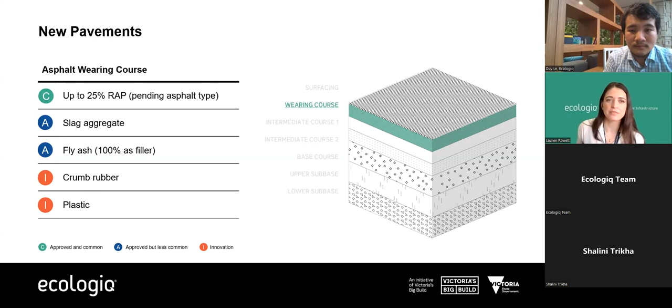Next up, we've got supplementary cementitious materials in structural concrete. As you can see, this page uses photographs as opposed to the technical drawing we saw in the last one, and your guidance on allowable limits here is quite broad. This is where you'd use those reference guides for further information as to what is allowable for each SCM and in each application.

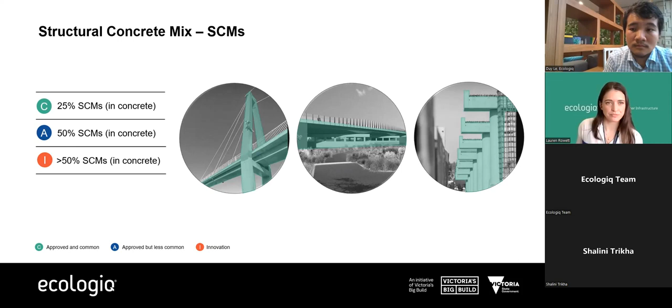Thanks, Lauren. Talk a little bit about a great case study featured early on in our Lunch and Learn series, I think late last year or earlier this year. The Western Program Alliance and the Level Crossing project actually pushed the boundaries in terms of innovating and went beyond 50% SCMs in their concrete mixes. The mixes for structural piling were delivered with Holcim, VicRoads, DOT, McConnell Dowell and Arup.

What they found there is significant obvious savings in carbon. We know that concrete is responsible for 8% of global carbon emissions globally, so any way you can replace that is going to be a real win. By pushing the boundaries with that, the project had to seek approval from DOT, or Vic Roads as it's formerly known, and they were able to come up with a 61% recycled content mix, which again met the performance requirements of a 40 MPa structural concrete.

Great case study. If you do want to find out more, you can reach out to the Level Crossings team at Western Program Alliance, and they're happy to have a chat with you about how they went about that process. Thanks, Lauren. Thanks, Duy.

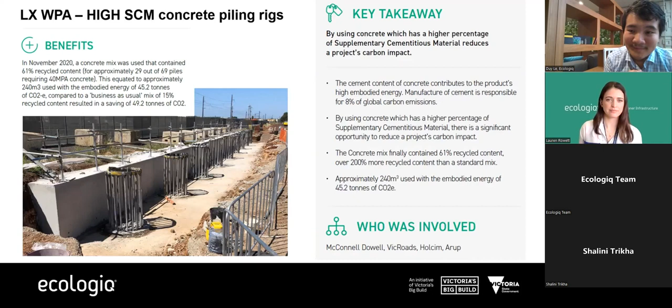So the next one up is noise walls. Noise walls sit in the concrete category, but as you can see, one of the approved but less common replacement options on the slide here is recycled plastic panels. This really just demonstrates that the sections refer to those business as usual materials, and within it there may be recycled alternatives which are completely removed from that business as usual product. So noise walls and retaining wall panels are generally a concrete product, hence being in the concrete section, but there are replacements here that are completely recycled as well.

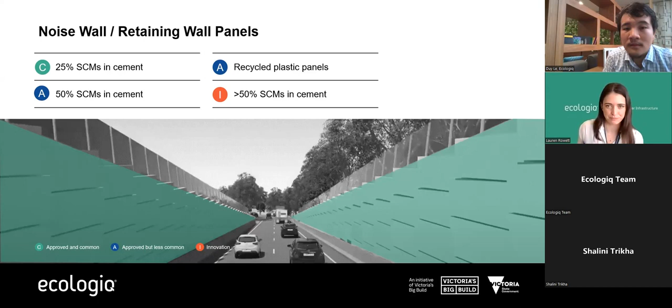Some of you may have seen recently the Mordialloc Freeway Major Roads project was touted as the world's greenest freeway and construction project, partly because of those recycled plastic noise walls that you see there, made of 75% recycled soft plastic—that really difficult to move plastic that you bring to your supermarket. Noise walls really are only limited by your imagination.

They've been used previously on the Peninsula Link Freeway, on the Monash Freeway. That's a concrete noise wall, but as those panels have deteriorated, they've been replaced with recycled plastic copies to fill those in. So when you're driving along the freeway, they're indistinguishable from other concrete products.

For the Level Crossing project, they found those particular panels are made with 50% recyclate, and the advantage of plastic is that it can be rotomolded, meaning it's hollow and lightweight. Not only can it put away a lot of plastic waste, but it has a lot of gains in terms of weight saving and safety when handling at heights. Similar panels are being explored right now for other projects like Melbourne Airport Rail with elevated rail viaducts.

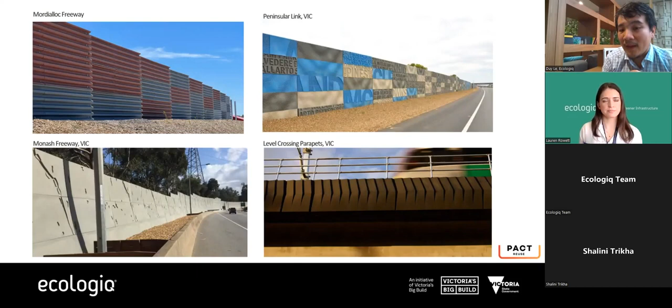This trial has research from Melbourne University finding that it meets the Australian Austroads national standards for noise walls. So this project, Integrated, is now looking for a project to trial this type of noise wall to meet Victorian Vic Roads or DOT standards. If there's any projects out there looking to set up noise transmission absorbing walls, this is one to look at—another innovation. This stuff is made here in Victoria, and it can again make a huge dent in our plastic waste problem.

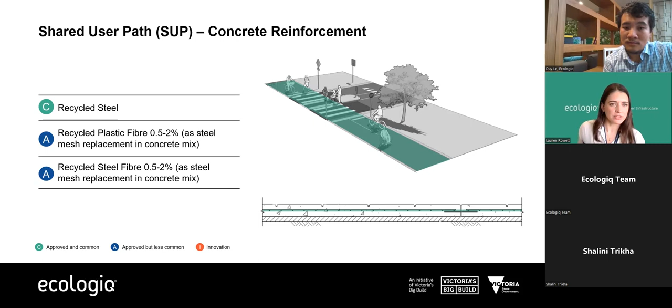The next one we're going to show you here is shared user path, and here we're actually looking at the concrete reinforcement. You've got the diagram showing where a shared user path is with cyclists and pedestrians along it, and underneath, the technical drawing showing that reinforcement goes right through the middle. This sits in non-structural concrete, and there are a few different plastic options as well, not always steel.

Thanks, Lauren. At the moment there's a product on the market called eMesh. I'm sure many of you may have heard about this already, but I want to take the opportunity to answer some questions and dispel some myths about its use. Firstly, there's significant carbon reductions in using eMesh, mainly because it replaces steel, which is one of the most carbon intensive metals that we mine for, and given the weight of the product, your carbon offsets are already there.

It has been used extensively across Victoria by some of the local councils on level crossing and major road projects, mainly in shared user paths. But it's actually been used for almost 20 years in Queensland, where despite some concerns, they found similar or superior performance to steel reinforced concrete, with superior properties in resisting—obviously plastic doesn't rust—but also resisting acidity and things like that in soils. Another benefit of using eMesh is it's manufactured in Victoria as part of the production of the product.

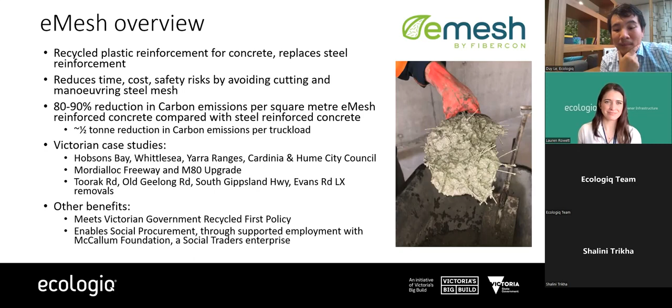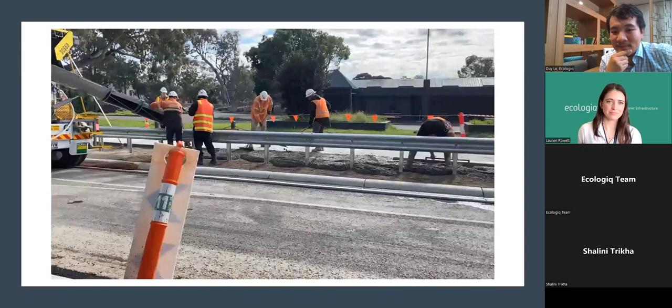A social trader and social enterprise called McCallum Foundation package and do the transport logistics for eMesh. It's mixed in at plant, so it doesn't always look exactly like that bundle of webbed concrete that you see there. Just to give you an example, we've got a video of eMesh being poured by the major road projects recently, showing workability. Thanks, Lauren.

And that's the final product there, shared user path. So there are some considerations in terms of workability when using eMesh—in terms of finishing and pouring. But the important thing is that the subbies who've been using eMesh and pouring the stuff have found that once they understood the workability, it's been faster to lay because it's quicker to work with than laying down steel reinforcement.

And there's obviously reduced safety concerns there as well. You can see from the finish there, if it's done correctly, there won't be any eMesh protruding from the shared user path or any plastic fibers sticking out. Those fibers themselves are actually UV stabilized, so even though they have a 40-year design life, they're expected to last a long time without degrading. Thanks, Lauren.

The next one we've got here is conduits. As you can see, conduit reuse is approved but less common. Obviously, with all reused products, they must be serviceable and approved for their intended use. And then we've got recycled plastic as an innovation, something that is ready to trial, and in fact is in trial currently.

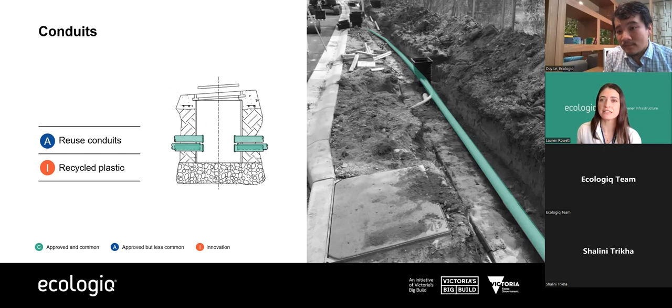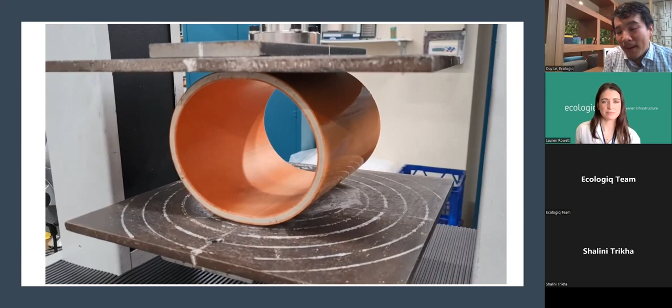This is what's called a sandwich layer conduit construction pipe, where that white inner layer is made of recycled PVC with virgin plastic only used on the outside. This is currently approved by V/Line for use, and the Shepparton Corridor project has laid over 130 kilometres of this conduit pipe. At the moment it's undergoing review by DOT, hopefully for approved use across Victoria.

It's important to understand why these conduit pipes are only 50% recycled in the center, and that's because this is what 100% recycled pipe looks like. At the moment you can purchase from RPM Pipes and Green Pipes a 100% recycled drainage pipe.

The only issue is you can't control the color of recyclates - you can see it comes in different colors, and this is one from another manufacturer, Green Pipe. So the industry has found a workaround in having solid core recycled construction pipes, and hopefully they'll be approved for use shortly across Victoria.

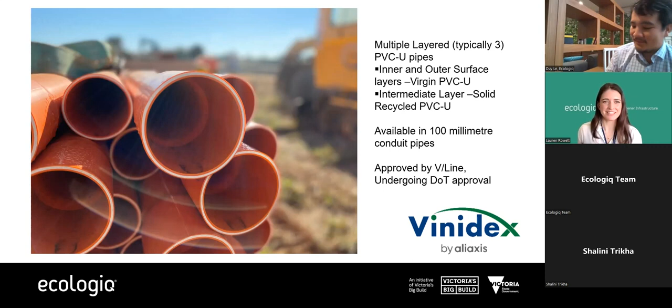This one's conduit bedding. As you can see, it's the same photograph we saw in the slide before with the conduits, but with a different part highlighted in green. As you go through the guides you'll see some photos used multiple times, just highlighting a different section. Again, you've got the diagram here showing where the conduit bedding actually is, which in this case is a replacement of 100% recycled glass sand.

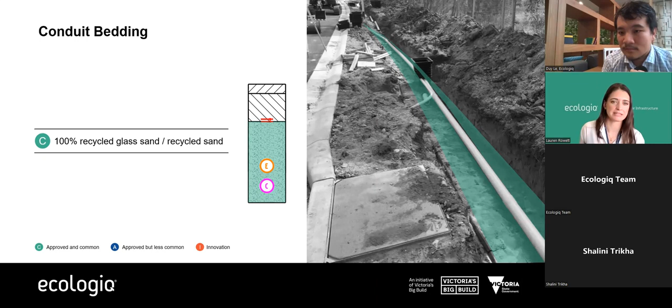Speaking of recycled glass sand, that can also be used in coloured surface treatments and line markings. Coloured surface treatments are very common, and line markings are a bit of an up and coming product as well.

One of the ones that you can use right away today, no trial needed, is OmniGrip's high visibility surface treatment. This has actually been used already by the level crossing removals project at Reservoir Station - that's a photo there of the surface markings at night.

I thought we could do better and actually show you what it looks like in real life, so that's a sample there. You can make it in different colors depending on what sort of pedestrian crossings, bus lanes, or surface treatments you need.

My understanding is this hasn't been picked up more because line markings and paint surfacing is often left to our subcontractors on projects. So if you're looking to use this, make sure you specify recycled glass sand or recycled products as an option for line markings. Otherwise you might end up with whatever cheapest paint and line markings are available on the market at that time. Great product - again, OmniGrip, Smarter Road Safety makes them.

I do want to talk about recycled glass sand for a moment, because every time we run these sessions we get the same questions coming up around risk, handling, OH&S, and silicosis. So I actually have a sample here of recycled glass sand.

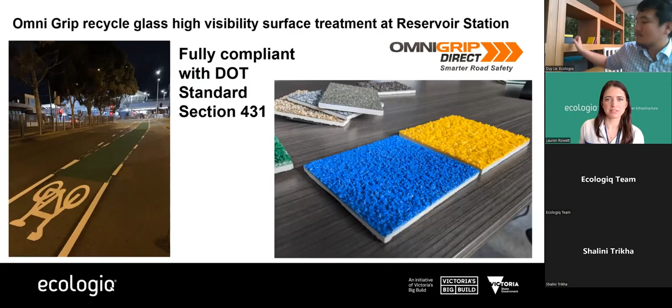So the next slide we've got here is sleepers. Sleepers are another one where we've got multiple recycled and reused materials covered - supplementary cementitious materials in concrete, approved and common. We've also got sleeper reuse, which would require inspection and approval by the rail transport operator to make sure they're in good enough condition for reuse, generally in lower risk areas.

And the third one here is recycled plastic composite sleepers. Although they are reasonably commonly used, they're listed as approved but less common because there are conditions or caveats to their use, which can vary across the rail transport operators, and each one would need to approve them for use on their projects.

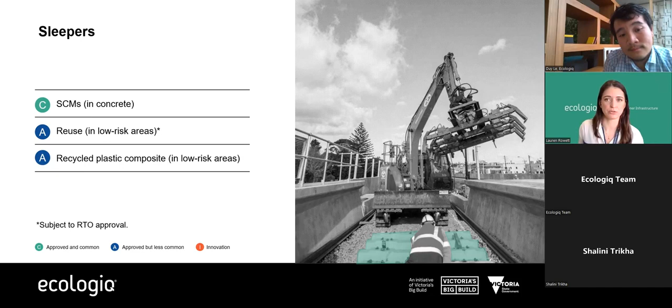This is a real story of homegrown success. Integrated Recycling manufactured the DuraTrack sleeper, made from recycled plastics, right here in Mildura, Victoria. It's already been type approved by MTM and V/Line for low speed use - for the regional rail revival program, level crossing removals program, stabling yards, low speed sidings, turnouts, and any low speed application. It's a great sleeper in terms of timber replacement.

At the moment, it's still undergoing trials with ARTC. In terms of putting away tons and tons of plastic, these have at least a 50-year design life, but they're expected to last a lot longer than that, easily outlasting timber sleepers, which need to be replaced every 15 years on average. Great product.

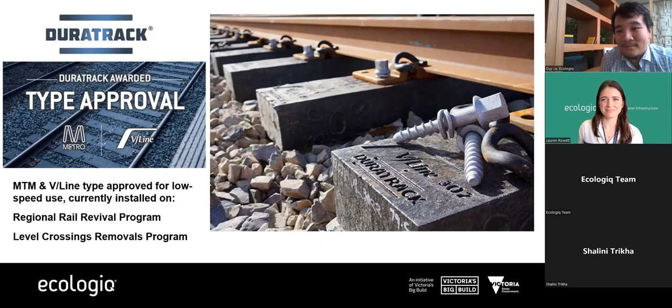So next we've got a few different options here, all approved but less common - really good opportunities to optimize on projects here. And Duy, I think you have a wheel stop with you as well that you can show us.

I do, we have a few samples of these. These ones are made by Plastic Forest, Australian made right here in Albury, just across the border. When speaking to projects, I visited one recently and saw them installing wheel stops in car parks. We asked them why haven't you considered recycled wheel stops? Again, this is often left up - they said it was down to the subcontractors to decide what products go in there. Now, these meet Australian standards.

I've seen these things installed in places like Kakadu National Park, in the Northern Territory and far north Queensland, where they recognise the benefits of using a recycled plastic wheel stop rather than any sort of import, which is what these often are. So my key messaging is don't skimp out on the ancillary applications - each one of these packs away a significant amount of plastic.

For me it's quite a significant paperweight that I don't need because I don't have much paper on my desk. But certainly when it comes to wheel stops and parking bollards and things like that, have a look at that as well, because whether you have recycle-first requirements or are trying to meet sustainability targets, it's a great thing to explore to maximize and optimize every opportunity on your projects. So thanks, Lauren.

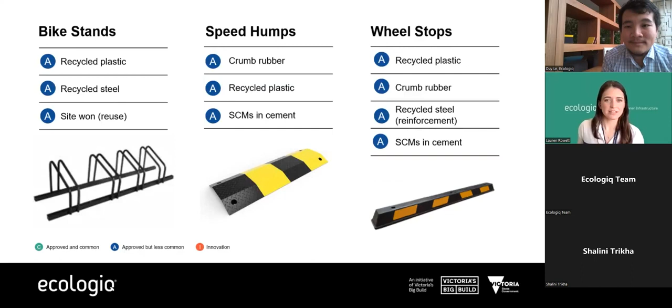And moving on, we're just going to show you through a few examples of applications where you may not have thought about it and never knew that these recycled materials exist. So soil and mulch is quite an obvious one, but planting edging along the sides of garden beds, tree guards, boardwalks and platforms.

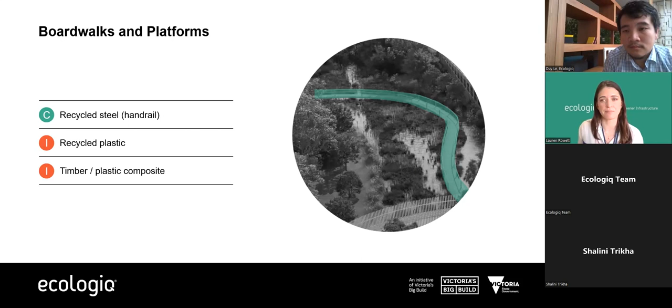Although it's an innovation, recycled plastic has actually been used really quite widely for boardwalks in places like national parks, and you often see them leading down to beaches as well. So there are lots of use cases, just an example where it hasn't quite cracked the transport infrastructure space yet. And then functional fitness equipment as well - we've seen a few designs come through lately that have a little bit of gym equipment, some recycled plastic alternatives for those as well.

Thanks, Lauren. I just want to take you on a quick tour of some of the recycled plastic products that are already available off the shelf. But the key messaging here, when we speak to the manufacturers, they are looking to hear from you what you want. So recycled plastics can be made to look like existing products, and as you can see here, I'd argue some of these are meant to look like timber or made to look potentially like steel roofing for shade structures.

If anyone's building a boat launch ramp, you can use them as well. Obviously, being plastic, it probably is better in a marine environment than other products. You jump to the next slide, please, Lauren.

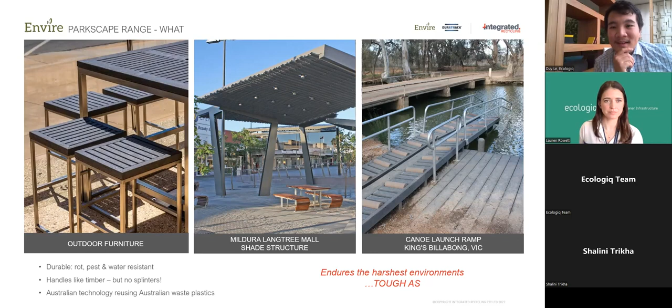But boardwalks, retaining walls, and bollards as well. So this is a range that's made by Integrated. They use agricultural plastic waste in their manufacturing, and it's up to 85% recycled waste.

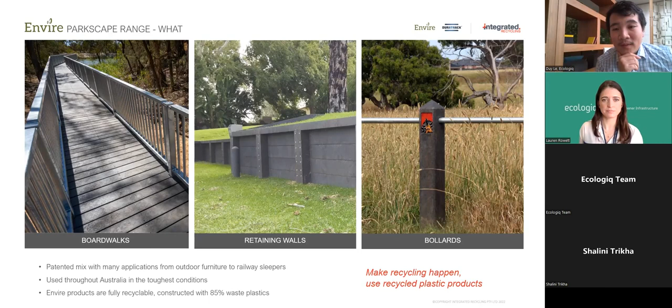For whatever reason, we're not seeing duplication of this. If you talk about the qualities of plastics, again, it can be made to look like timber. When you really start to embrace the fact that it can be made and molded into different shapes, it really is limited only by your imagination.

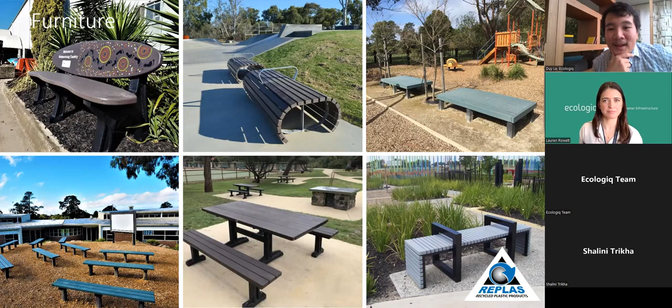Again, so with all the different park benches and options available to you, I think we do want to dispel the myth that recycled plastic can only be turned into your bins. So I think you could see here that the range is quite exhaustive, and the options are really only limited by the imaginations of any designers and architects that might be here on this call.

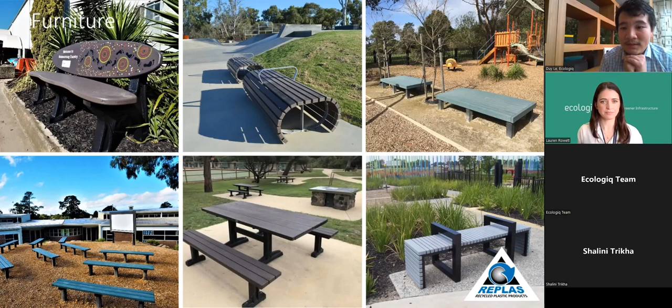Bollards - I know that our projects put up lots of these, and at the moment there's even a recycled version coming out for temporary T-stop traffic bollards, with a company called OC Connections. So those orange traffic management bollards, you'll soon be able to get a recycled version made right here in Victoria as well.

Absolutely. And then the final one we want to show you from the visual guides is insulation panels for buildings. So this would mainly be for railway stations, but we're starting to see some really great innovations coming through.

So we've got textiles, which is an increasingly problematic waste stream, and we're seeing a few things in development with suppliers - coming up perhaps in the next 12 months. And then also straw, a byproduct of agriculture, which can be made into fire resistant and acoustic panels, and is widely used in stadiums and concert halls, but not yet adopted into the transport infrastructure space.

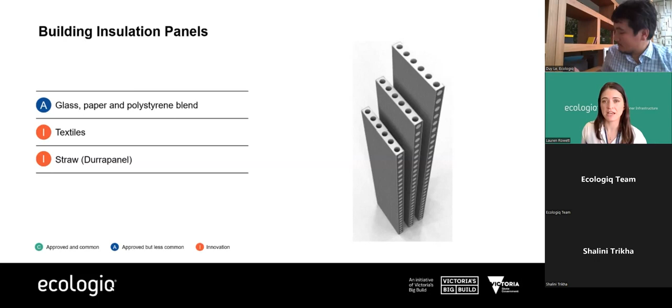But also glass, paper and polystyrene blend, Duy? Yeah, so this is a great little product that's available right now, called the Coharo coating by Casafico.

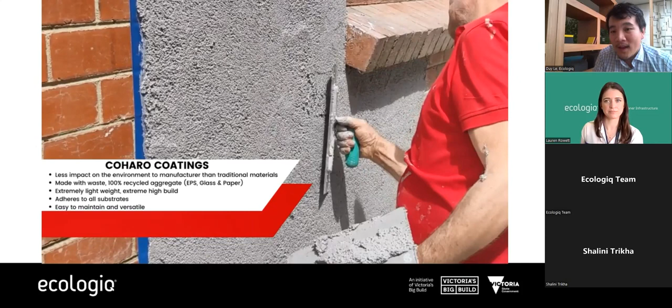That is a leveling coat, so it's not shotcrete, but if any of your projects are using shotcrete and need to do a follow-up leveling coat, you can use the Coharo coating. It can be applied by hand, as you can see the gentleman working with it, or it can also be sprayed on. It's made from 100% waste, and it's been used in the Melbourne Metro Tunnel to do some leveling works down there. So again, some of these, although they may appear small, represent a significant use of really problematic waste like polystyrene, glass and paper.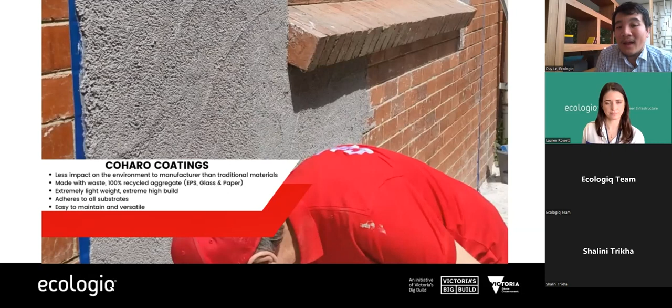Thank you, Lauren. I might take a moment and talk to you about our reference guide. Lauren said earlier that the visual guide is best used as an accompanying piece to our reference guides. For those who don't know, ecologiQ has issued now 4 reference guides that are freely available on our website and also on our Knowledge Hub. The reference guide acts as a one-stop shop, a handbook that's collected all the standards and specifications that permit the use of recycled materials.

So you need to jump to the first one, Lauren. We have a reference guide in road infrastructure. This guide actually collects - we've reviewed the Department of Transport and also the Australian standards, and identified all the relevant standards and specifications that permit, or that are performance-based, allowing for you to use recycled and reused materials.

It's a common barrier - the first question we often get is: is this in standards or spec? And I say consult the guides, because a lot of work's gone into collecting this.

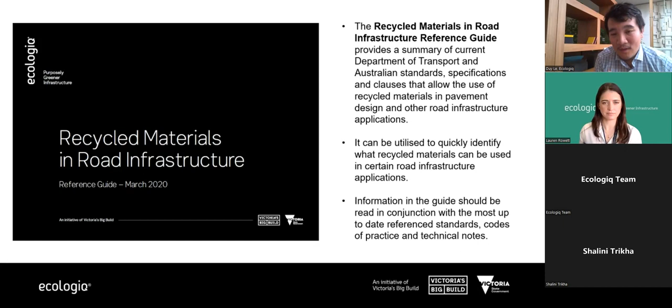If you jump to the next slide, Lauren. You can see when you open up the guide, you can look by material application and see what materials are permitted. So if you're out there looking at pavements, you can see what sorts of recycled materials are permitted. Within the guide, there are live links, URLs to the actual relevant standard or specification, so you can look up and see exactly where it permits the use of that.

I'll add a proviso - these guides were first published in March 2020. We're going through a review currently, and for the next iteration, our technical team has been doing a lot of work with DOT and other bodies to reform new standards and specs. So for example, if the conduit pipes we spoke about earlier are finally updated, you'll see them show up in new versions of this guide. The next version will also include road stabilization, which is an area well practiced in other states but hasn't quite seen the same level of adoption in Victoria. There's obviously a lot of advantages in stabilizing and recycling existing roads before building new ones.

Next slide - we also have a guide to rail infrastructure. Here in Victoria, if you want to use recycled materials, often if they're safety critical, you need approval and type approval from the rail operators - so that's MTM, V/Line, ARTC, and if relevant, Vic Roads as well. We've actually collated all the standards and specs from those operators.

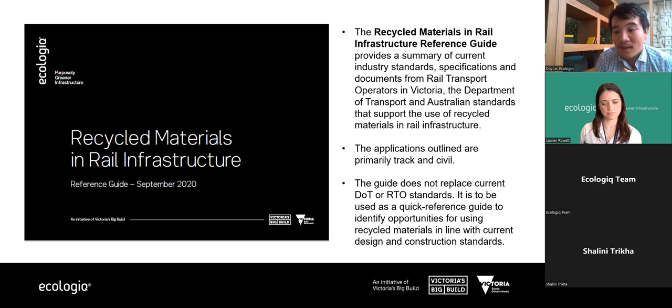If you jump to the next one, Lauren, into the rail infrastructure guide - what you'll see is things like, if you want to look up the standard and specification for reusing track or using different sleepers, the document has live URLs. Once you jump in, you look up the application you're looking for, click on it, and it'll take you to the right type approval, standard, or specification that permits the use of that application and material.

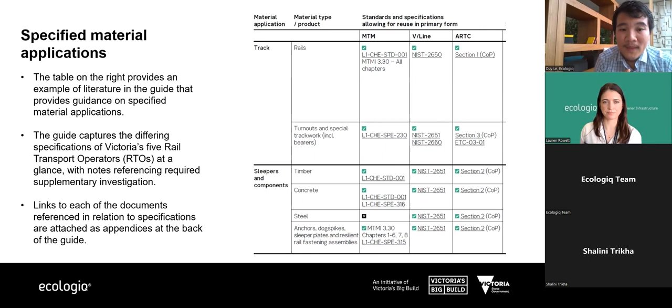And last but not least, as I mentioned before - ancillary. I call this 'the other' - all the bollards, fencing, everything that isn't road or rail but has a significant application. From landscaping to roadside fencing, it's often a lot of the non-safety aspects, but certainly can make a real big difference in terms of using our recycled and reused waste streams.

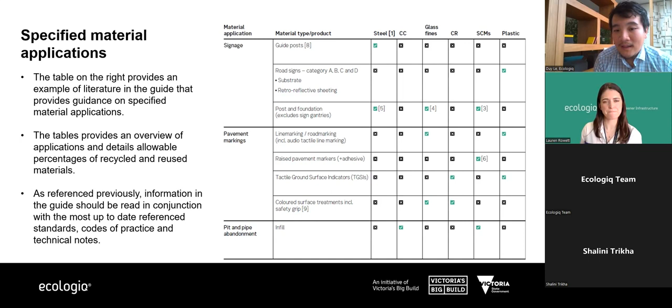Lauren, if you jump into the next slide - in this reference guide, everything from signage, pavement markings, pipes and pits. This collects not just DOT standards but Australian standards as well for what application and what materials you can use. I'd say for anyone looking to use our visual guide, really consult the reference guides as well, because that will show you the standards and specs that allow for the use of these materials. We should be republishing new versions of these by the end of the year.

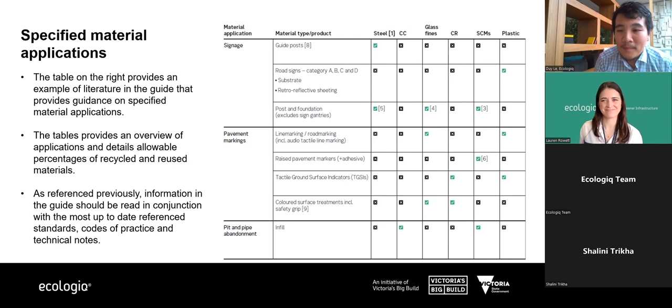Next, please. Thanks, Quy. So I guess once you know what you want to use and you know that it's allowed, the next thing is to find a supplier. So I'm just going to do a quick demo of the supplier map - bear with me whilst I sort out my screen share.

So this is our supplier map, which can be found on the knowledge share. I just want to give you a really quick tour through it. Each of these black dots represents a supplier in Victoria of recycled materials. Am I screen sharing the right side? Yep, cool, just checking - too many screens here, I'm not sure which one's up.

There's a few different ways you can search. You've got application category to start when it loads - we've developed this list of categories alongside the users, trying to make it as simple as possible for contractors, government side, and delivery agencies to use. You've got aggregates and fill, asphalt and spray seals. For example, if I was looking for asphalt, I can tick that and it will filter down to all the suppliers. You can scroll in and out as you would on Google Maps, then click into any of the dots near your project, and all the information will come up.

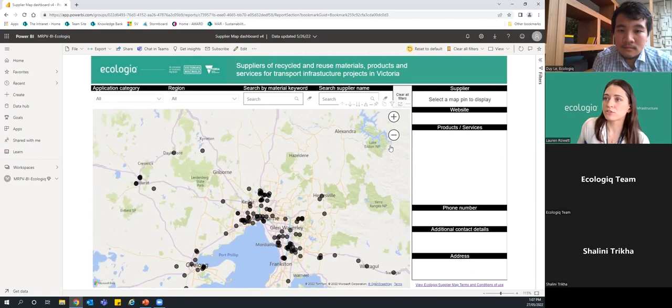And these are all linked as well, so you can click through and go straight to the websites. I'm just going to hit clear all filters. You can also search by region. Eastern Regional, for example, we'll scroll into just those Eastern Regional suppliers.

You can search by material keywords. So if you wanted something made out of plastic, you can just pop that in. Obviously quite a lot with plastics. Or if you were looking for a certain application, so you know what kind of pipe you wanted, for example, and you didn't want to see all the pits as well, you can just put the word pipe in and it'll come up with just all those pipe suppliers.

You can also search by supplier name. So if you know that Alex Fraser do a product that you're looking for, you can just pop in Alex and it'll come up with all those Alex Frasers. And that's it. It's pretty simple, really.

And Duy, I think you're on this one. Yeah, I just wanted to just give you an idea. I mean, most of you, I think, will be aware that ecologiQ sort of exists to support the industry.

But really it's also there to ensure that when we rolled out the Recycled First policy in March 2020, that we are seeing the outcomes. I think this is just a great little case study where we looked at when we compared two arterial road projects, one that had the Recycled First requirement and one that didn't, and just seeing the amount of recycled material that was used on the project that had the Recycled First policy applied to it. So in comparison to the other one, we saw 5 times the amount of recycled material overall. So 2.5 times more reclaimed asphalt in the pavement, 65% more recycled glass, and 60 tons of recycled plastic, up from next to none.

Now, to give you a bit of context, when it comes to our most pressing priority waste streams here in not just Victoria, I'd say Australia, but plastics, rubber, textiles, organics keep topping the list, because those are the materials that we have plenty of, but we don't have enough uses for. So we think the big build and the projects here, and even any smaller construction projects or procurement opportunities, even with any local councils that might be on the call here today, are all integral to seeing that we make value and make valuable use of that waste stream. So the policy is, we're seeing those very, very strong impacts.

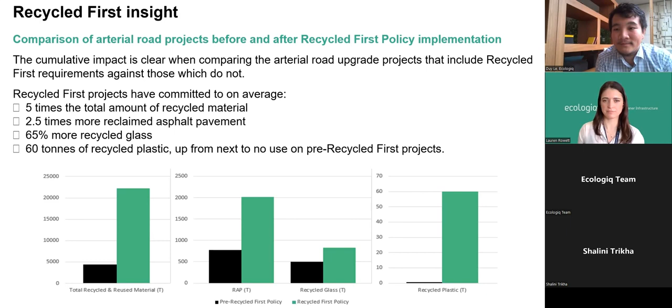In terms of what's next, I hope you've enjoyed today's Lunch and Learn. I think we've just run a little bit over time, but in a couple of weeks' time, we'll be having our Innovation Showcase and Exchange. This is our bi-monthly series where we get businesses to come and showcase to you what they can do. This one's a particularly special event.

We're partnering with Kinaway, the Victorian Aboriginal Chamber of Commerce, and Social Traders, which is the peak body representing social enterprises, and we're going to be getting those businesses coming to present to us. These are businesses that might be manufacturing or looking to enter partnerships with the sustainable recycled supply chain for our project. So please come along to that. You'll meet some great businesses, and through the exchange, we're going to match you to meet with some of those organizations as well.

With restrictions easing and returning to a post-COVID sort of normal, ecologiQ is also running our first conference, which will be on the 6th to 7th of September. The expressions of interest have gone out. It was announced by the Minister last week, so please save the date. It'll be at the Melbourne Exhibition Centre. We'll have a trade show. We're going to have lots of great speakers. And we're going to talk about how greener infrastructure is absolutely the way forward for not just Victoria, but hopefully Australia as well.

Now I think Shalini might be over to you for any questions we might have. We've got a couple of questions. Great session, lots of information. First question is, is using glass for recycled sand the best value use of glass? Yeah, I'm happy to have first run at that. Great question.